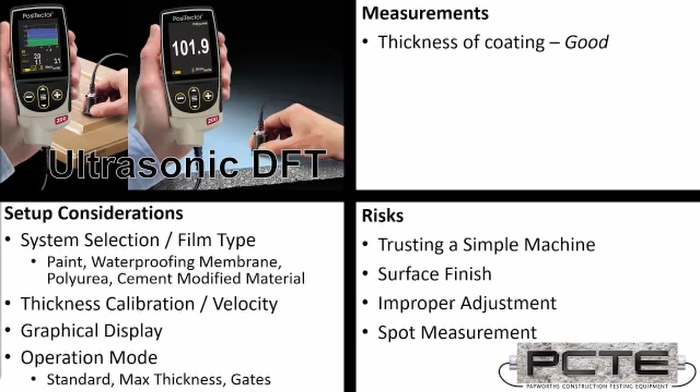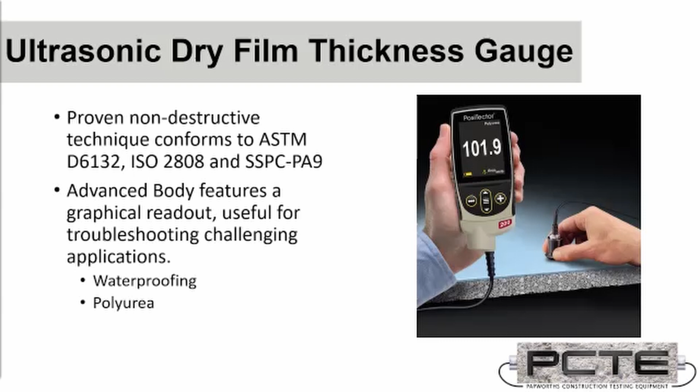So just a little bit more on the theory. The ultrasonic measurements, there are American and international standards that define the test. The DeFelsko PosiTector range offers graphical readout. I recommend this to everyone doing waterproofing measurements. I do think, just because that's a more complex setup than measuring paint, you simply have to be able to review what the machine is doing. I know I'm saying this a lot, but I really do believe in the operator seeing what the gauge has done and confirming.

The physical principle is when we change from one distinct material to another, we get a returning echo, a sound wave return from the ultrasonic pulse from the gauge. In this example, it's gone through two layers. There are two clear reflection peaks on the chart, and the gauge, using its automatic pick, has picked the tallest peak and recorded a thickness of 75 microns.

If I was teaching operation, I'd go into a little more detail on how these automated choices are made and how to adjust if the machine is reading the wrong reflection. Now, I say reading the wrong reflection - how do you tell? Well, you've got to know what you're expecting to find and be able to match that back to what you are finding in the real structure.

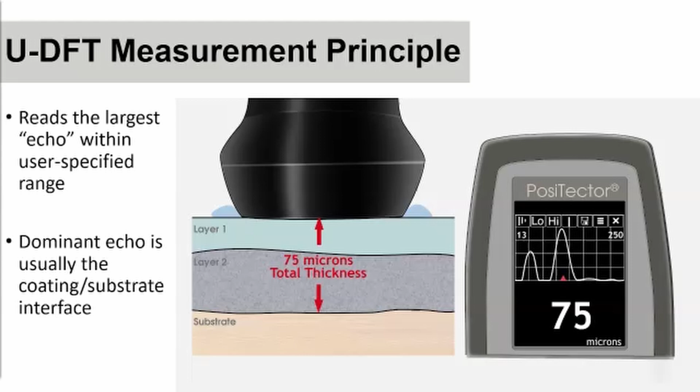Now, there are several stages to make sure you're comfortable. Firstly, there is calibration provided with PosiTector equipment, so it's important to make sure you've actually got that traceable documentation, making sure your gauge is operating correctly. It's also important, for the purpose of using it today, that you've checked its operation. The 200 series is provided with a reference chip of known thickness, which can be used to check that the gauge is still measuring that chip correctly. If the measurement is out - a little thicker or thinner than expected - you can adjust that gauge's readings to correctly match your verification sample.

Now, practically, you may not be provided with a reference chip that perfectly represents your materials. The supplied one from DeFelsko is a white plastic material, a reasonable model for paints and standard waterproofing membranes, but entirely inappropriate for materials like polyurea. So you may need to make these adjustments to your particular coating.

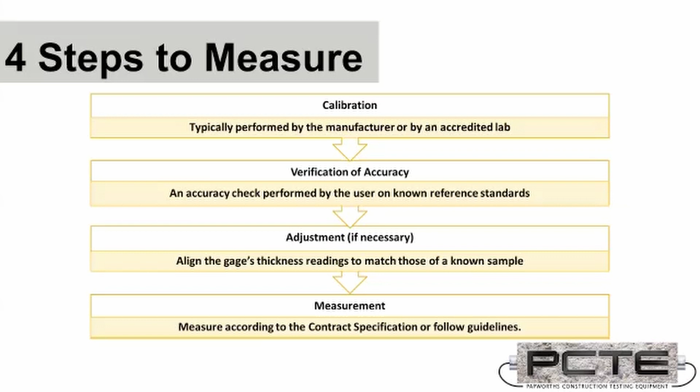And even if it's just a rough check, it's nice to compare samples of that material you've prepared off the final substrate, as an example, or samples you've cut from that substrate to make sure that it's adjusted and measuring correctly.

Then finally, you need to think about how you're measuring to actually capture the real performance on site. So again, I'm not at all a fan of taking an individual measurement and calling it done. There's too much variation, even within a small area, maybe 10 millimeters diameter sample area. There will be highs and lows.

There will be thicker sections of material. So you do need to collect and average your results, have an agreement if you're working for someone, how compliance will be measured, whether it's average or minimum measurements must be above a certain point. And you must have an approach from where you'll take those measurements, and whether there's a random sampling or other setup required to do that.

So that's a brief discussion about measuring coating thicknesses with ultrasound. Does anyone have any questions before I go on to talking about cover meters?

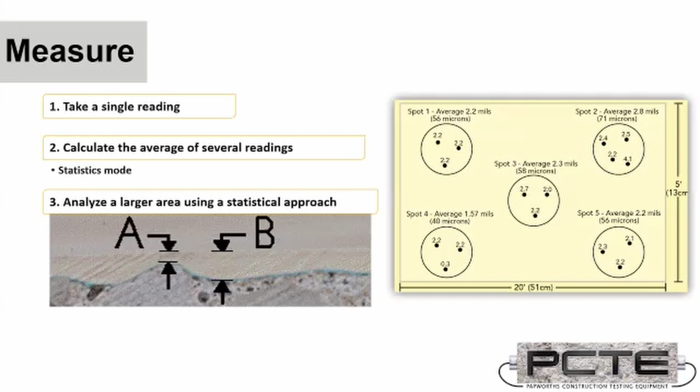So moving on to cover meter systems, we're still measuring thicknesses, but we're now measuring the thickness of the rebar cover, the thickness of the concrete from the surface to the top of the reinforcing steel.

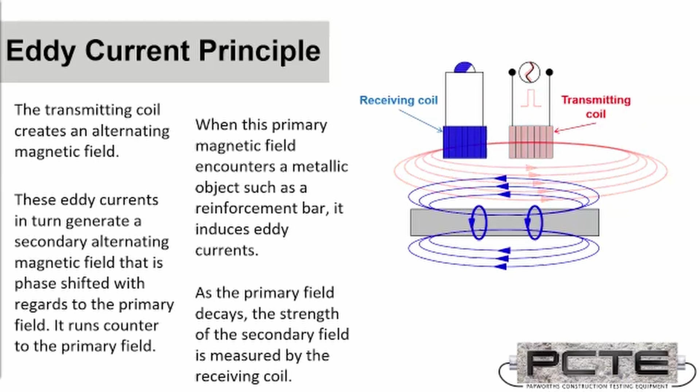It induces a current, electrical current in the reinforcing steel. This produces its own electromagnetic field, and we measure the strength of that electromagnetic field. That is the raw measurement from a cover meter. Again, it's not like a ruler or a caliper. We're measuring one value.

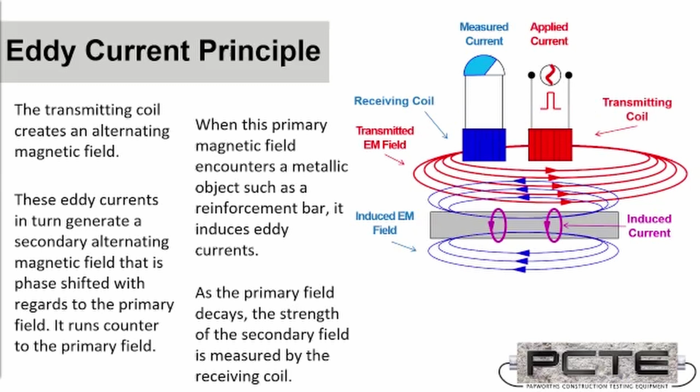So in order to convert from the signal strength to a depth, we need to enter reinforcing diameter. Now, we've got a defined range of performance for cover meters. So out to roughly 80 millimeters, you'll be within 1 millimeter of the real cover depth, which is very precise, provided you've entered the correct reinforcing diameter.

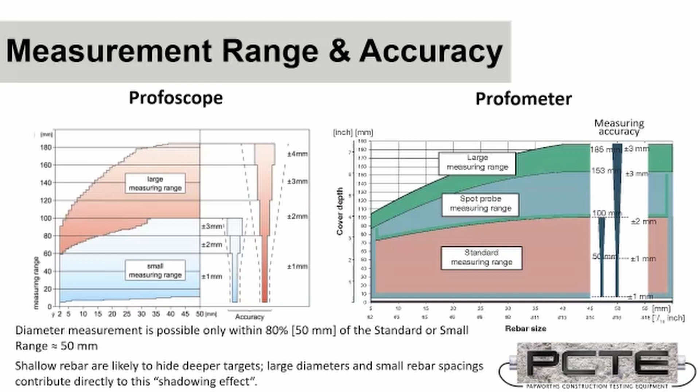Then it'll, at its worst, at the maximum range of around 140 millimeters, or a little bit deeper for very large reinforcing steel, you'll be at 3 or 4 millimeters precision. So this is information you can directly use. And that's why I call the cover meter measurement excellent. We've got defined performance and a defined procedure to achieve good measurements.

So the rebar diameter estimate is quite a different signal. We're measuring with a weaker and stronger signal strength coming from the probe, and essentially looking up what the expected performance for particular reinforcing sizes would be. This measurement works down to around 40 or 50 millimeters depth. It's an estimate - I would not like to give a particular range of plus or minus on this measurement. I have a comment from Harold about the aggregate in the concrete having an effect on values. Now, that's true. For a ferromagnetic cover meter - for eddy current cover meters, they would actually need to be metallic and conductive to affect the measurement, but ferromagnetic cover meters certainly will have a performance effect from the aggregate.

When I talk in a little more detail about the sources of interference, conductive metals are the big killer.

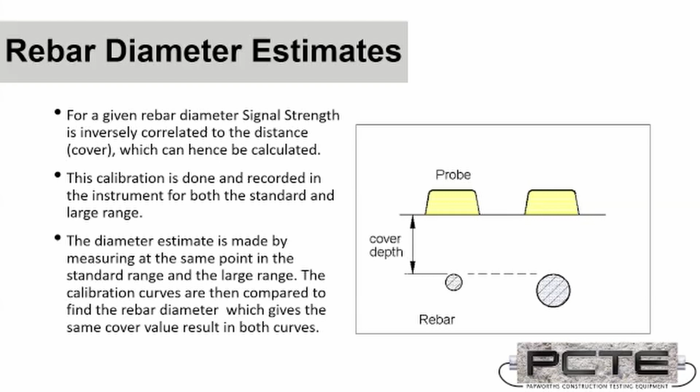Now, just talking about procedures, the most important aspect of getting the real reinforcing cover is you need to locate your measurement directly over a single reinforcing bar. If you just go straight to a concrete surface and place your cover meter on that surface, you're not going to be correctly measuring that.

So what we're going to want to do is actually follow a procedure to physically place that, to determine the reinforcing and lay out the grid of the reinforcing. So to begin, I'm going to want to take a scan.

So to begin, I'm going to want to locate the reinforcing steel in one direction. I'll cross it usually 3 times to ensure it's straight, and I'll pick up its position. I am not yet recording the depth of the reinforcing steel during this stage of the process.

I can now locate the reinforcing crossing in the other direction. Because I can situate my cover meter probe in between, in this case, the horizontal bars, I can correctly measure the depth to the reinforcing bars, provided I've entered a correct reinforcing diameter. I'll take several measurements so I can get a minimum, maximum, and an average - you never want to take a single measurement with non-destructive tools. Finally, I can go back and record the cover depth of the horizontal bars.

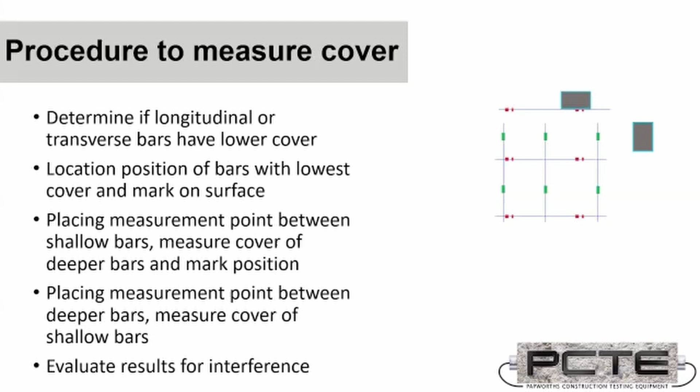So just to cover that again, we are physically locating our horizontal bars. Then we're locating our vertical bars and recording cover depth during that process. And then finally, I'm going back through and recording cover depth of my horizontal bars, now that I can locate the probe correctly distanced from the other reinforcing steel.

So next I'll go into measurement of the ground penetrating radar. Does anyone have any questions on cover meters before I continue? Or comments? Again, it's as much a discussion as a presentation today, so please do let me know.

We had a question about whether the Profometer is any more accurate than the profoscope. So the Profometer and the Profoscope are Proceq brand cover meters. They both use the same measurement procedure, a pulsed eddy current measurement, which operates to the same precision. If you have a look at my previous slide showing precisions of cover meters, I actually had a chart talking about the Profoscope and the Profometer cover meter.

If I was choosing between these two options for my business, it would be more about whether I have to do complex work, for which the Profometer has more adjustments and better visualization to make complex work possible. Something like measuring reinforcing cages and precast elements - I like a Profometer for that. It's easier to deal with congestion and more involved reinforcing layouts. Whereas if it's a simple wall or floor every time, a profoscope's not going to struggle. But it is possible to achieve the same performance with either device, provided you take enough care with each device and choose good measurement spots.

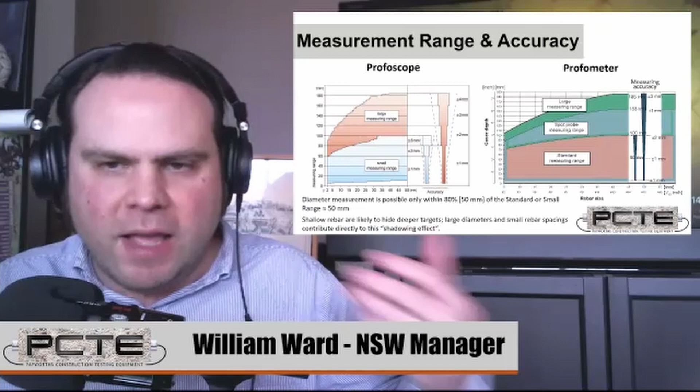John asked if it is possible to know what to do if we do not know reinforcement diameters, which is a good question. With as-built structures, often you will be able to get that information. If you don't know, it is possible to look at the range of possibilities.

So this is another chart from the profoscope manual, which explains the variation in cover depth precision - sorry, the variation in the measurements if we have reinforcing bars that are bigger or smaller than a 16 mil bar, and we set the machine to 16 mil. So let's say you have a slab on ground, and there's a possibility you could have bars from 8 millimeters to 16 millimeters. You could use this information to determine the additional uncertainty of your depth measurements and maybe make a conservative choice when you don't know the reinforcing diameter.

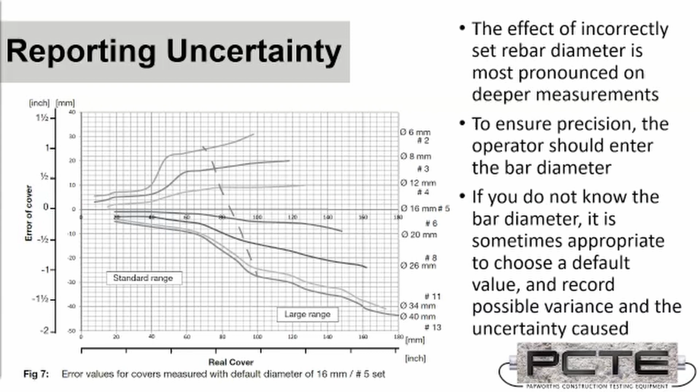So this definitely needs to be covered in your procedures if you can't get that information. I do hope for as-built structures you would have the opportunity to ask about what's intended to be in there, but if you don't, there's ways to consider that. Do I have any more questions on cover meters before we continue?

Mal asks, what equipment is more accurate to measure reinforcing diameters, cover meters or other? Well, I would say other because I'd use a drill. The cover meters will estimate reinforcing diameter, but they're not good enough that I would consider that measurement to be your master reference for diameter.

Particularly when we are concerned about measuring diameter, it needs to be backed up by inspection. Again, for a new structure where we know what's in there, this becomes less of a question. But when we don't know, we've got to back it up with physical confirmation.

If you want to talk more on this, as this question comes up almost every time I discuss cover meters in other webinars, there's more detail in my previous cover meter webinar on our YouTube channel. I've got another question: if there's a tile on the floor, how will this affect the rebar diameter measurement results?

It shouldn't affect the performance of the diameter measurement because it's not a source of interference, it's merely an apparent thickening. If there was additional metal as part of installing that tile, it would affect the measurement. Also, if that thickening placed the overall cover depth below around the 40-50 mil range for which the diameter measurement works, it would prevent the measurement occurring.

Ground penetrating radar tools are our first scanning tool, which means we're no longer taking a signal strength or an individual signal measurement. With our dry film thickness gauge, it was ultrasound - we sent a single sound pulse and measured the signal that returned. With our cover meter, we just measure signal strength. With ground penetrating radar, we are now sending repeated pulses of microwave energy and recording the response.

Particularly with the Proceq instruments, we're using a slightly different principle - a step frequency continuous wave antenna - but practically we no longer get an individual measurement or result. We get a scan, a visual representation of the structure. Within that visual representation, a skilled operator can interpret it to determine the position and depth of reinforcing steel, the position and depth of embedded objects, and if the concrete structure is sufficiently thin, we can also usually see the thickness within the range of the ground penetrating radar.

Everything except the lateral position of objects will not be correctly recorded without some setup. Lateral position is based upon the physical wheels attached to your radar - encoder wheels that know how far it's moved left and right. That's why object position is a measurement. We're seeing the position on the image produced by the scanner. If we line up directly on top of it, or measure between two positions, we can determine that geometry as a direct measurement. But our depth measurements are indirect.

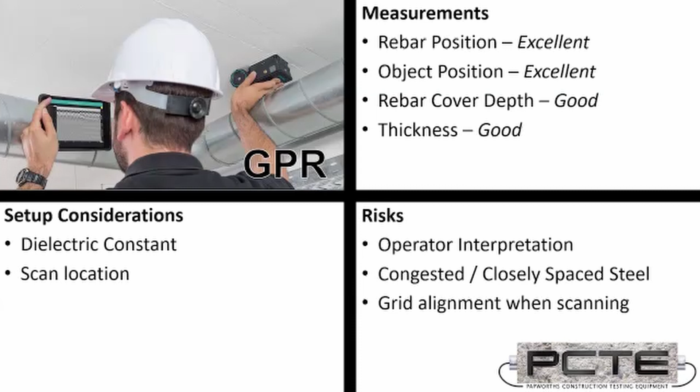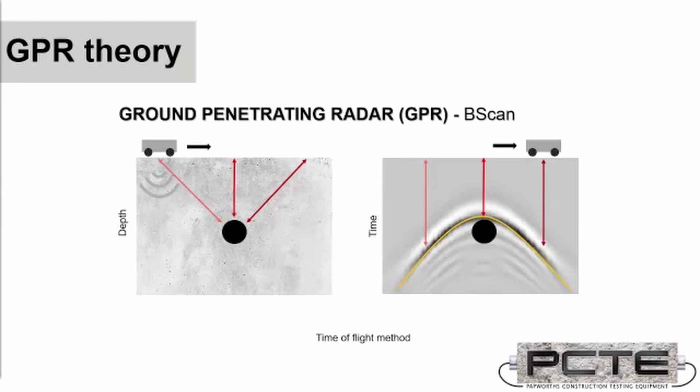So just a quick word on the physics. The ground penetrating radar sends electromagnetic pulses, a signal into the structure. As we become close to a target, which we're crossing at 90 degrees, we will produce a hyperbolic signal, a little bit like a fish finder. What do I mean by that? Let me show that graphically.

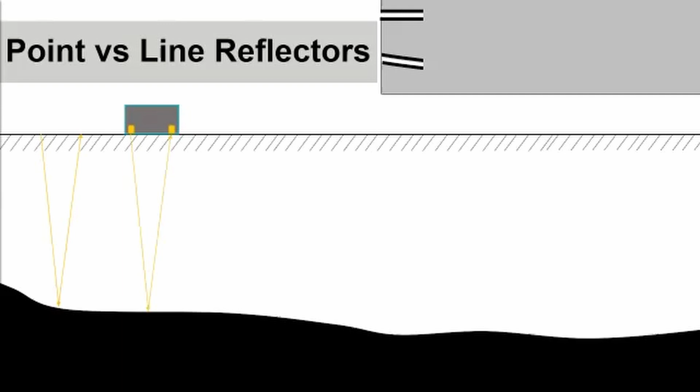So the thickness of the concrete structure or a layer inside soil, if we're going over a flat target, the closest point for the radar is always underneath the machine. So we get a flat presentation for flat targets we're crossing parallel to.

When we cross an embedded object perpendicular - excuse me a second, I'll just mute that sound - when we're crossing an embedded object at 90 degrees, we start to get signal from that object before we reach it. When we are directly over top at the closest point of that embedded object, we have the peak of the hyperbolic signal, and then we still get signal as we pass beyond that embedded object.

In this case, I've chosen a steel object because I also want to highlight the effect of steel higher in a structure, where it will shadow what's underneath it, so it can hide additional reinforcing or other targets if they're not clearly visible due to the hyperbolic reflections from them.

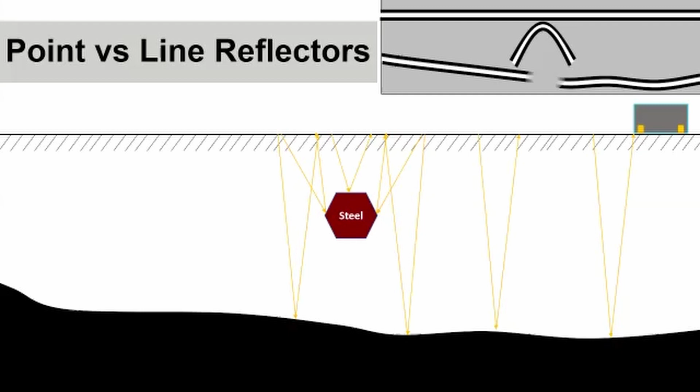So, the first risk I talked about was alignment of the grid scan. Whenever we're showing one of these quite clever presentations where we have the results projected over a surface, or we have a 2D slice or a 3D presentation of data, what we've done is taken several scans on an aligning grid. And when we take those scans, we're then able to stitch them together to get our slice or 3D presentation.

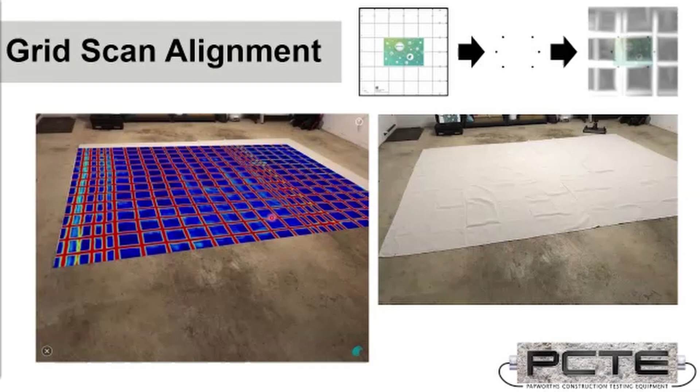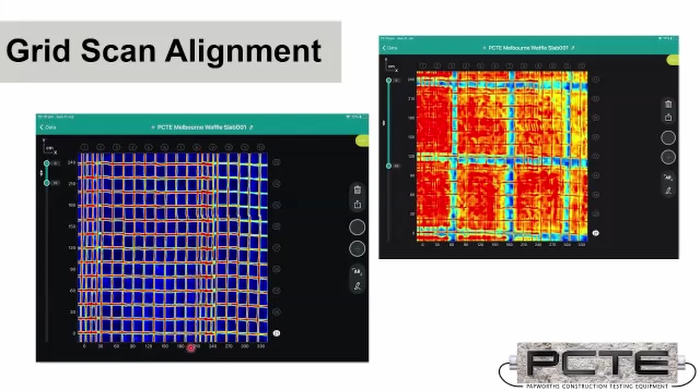So we can see here, this was taken on a waffle pod slab, so polystyrene void formers forming thickened ribs on the underside of the structure, which you can see here, and also with conventional reinforcing. We can see where that conventional reinforcing laps, and everything's pretty well aligned on this. This was the hero scan. This was the good one.

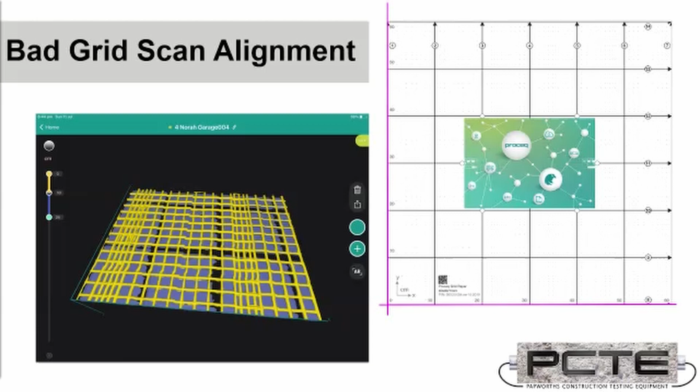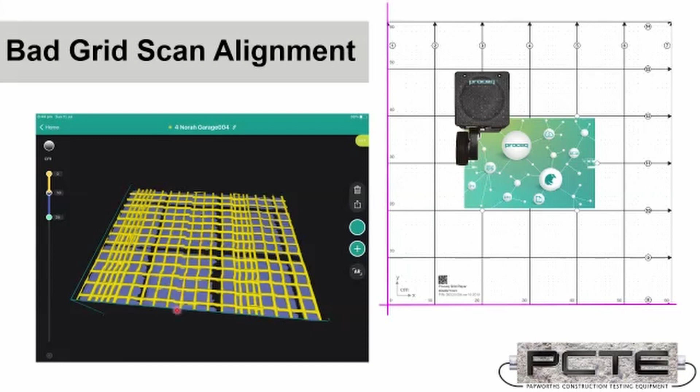But what I want to actually show you is what happens when the scan isn't lined up correctly. This is a previous scan of the same area where it wasn't quite right. You can see these little stitches and little disconnects. What's happened here is that when my colleague Stu was taking this measurement, he didn't align the radar correctly on some of his scans. What we would have done is, when he was placing the radar probe onto his grid, his alignment would have been, rather than straight on top of the 0 point, it might have been slightly after or slightly before the start line, with the visual effect that the reinforcing is no longer continuous.

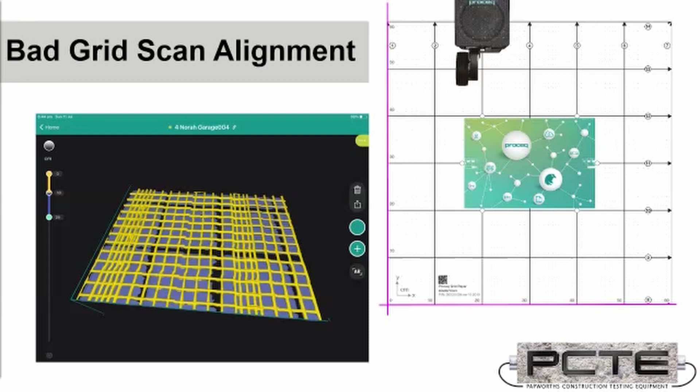So if you are going to make use of 3D functions or scans where you're combining several measurements - this was taken with the GP8100 radar, so that's an array antenna, 6 scans per movement, so it's quite a large scan, around 3 by 4 meters - that initial alignment is the critical thing to get right to have everything in the correct position.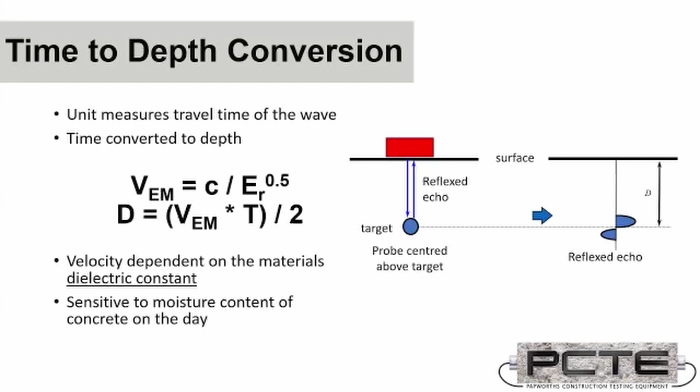Now, let's talk about depth. Once again, we're not directly measuring depth. We don't have a ruler. We're measuring time, the time for the radar signal to go down and come back. In order to know the velocity of that signal and mathematically convert to thickness, we need to know a property known as the dielectric constant.

It's a unitless measure of a material's ability to hold and pass a charge. Values range from 1 to around 81 typically. The reason I highlight that is water at 81 is quite a large value, so it means that the amount of water in the concrete will affect the precision of depth measurements. So we need to adjust dielectric on the day we take measurements, not adjusting depth, but coming back to the same site 2 weeks later and considering that value to be okay.

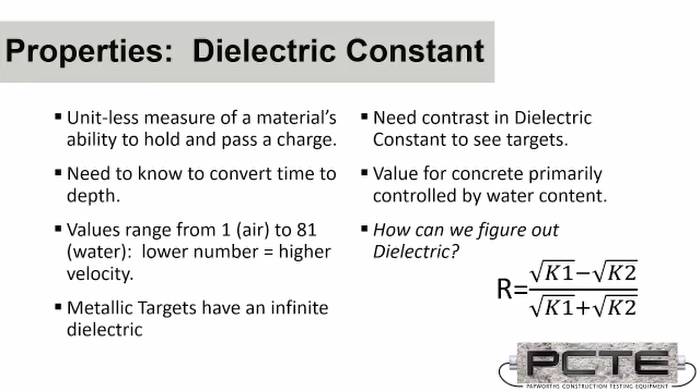It's a measurement that you adjust each time you go to site. There are a couple of ways we can make the choices, and the quality of the input gives us the quality of the thickness measurements, along with the quality of the positioning pick by the operator. So specifically here, we could take a guess.

5 to 11 is a reasonable range for cured concrete. If we know the physical thickness of that constructed element, or if we know a precise depth, maybe from a cover meter measurement, we could use that to choose a dielectric to get those depths right and bring everything else into correct depth. Or it's possible to overlay the hyperbola on the scan with a mask that represents the mathematical shape of hyperbolas for a particular depth.

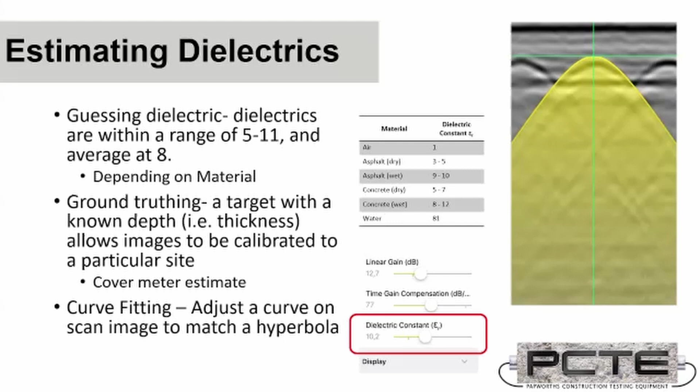So if you haven't taken one of these steps, the thickness value on the left-hand side of the scans is not meaningful. You haven't set it up, you haven't made the adjustment on that procedure of calibration, verification, adjustment, and measurement. So you've got to make that adjustment before you can go forward.

Now, a few more risks. We are talking about as-built structures, which means the concrete may be quite fresh. This is going to have a big effect on the amount of water, so the dielectrics may be quite high. We may also have signal loss, so we may not go as deep as the physical devices normally can. A device that might achieve a 700 millimeters maximum depth may only achieve 300 or 400 millimeters or less in very fresh concrete.

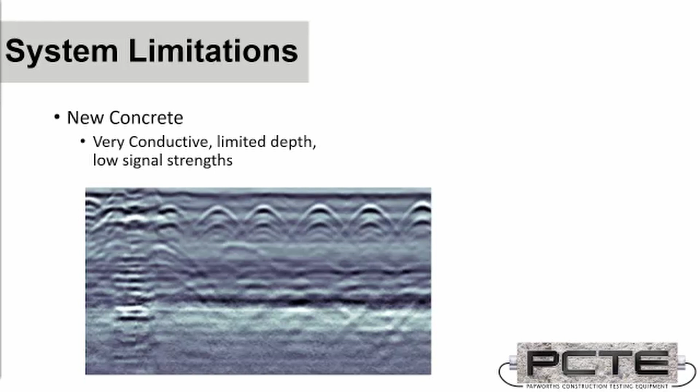So we can lose signal, and we need to take particular care with our dielectric adjustments. We also need to be aware that our biggest source of metal at the surface is that reinforcing, and that metal can either interrupt the signal completely. If you're scanning on top of a metal plate, the radar's not even making it through the metal. If it's a steel fiber reinforced structure, that's just the same - it's not going to go in. And you can get shadowing effects, where metal above a target can cause shadowing underneath. In this example, there were shadows on the thickness measurement because of the metallic targets above it.

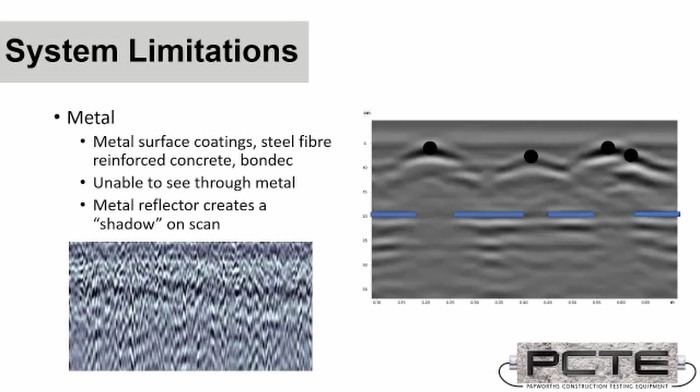Now, I did see a quick question. The question was, how do concrete overlays such as asphalt affect GPR scanning? Can you allow for non-uniform dielectric constants when GPR scanning to account for asphalt over concrete?

That's a very good question, and you're quite right - it's not going to be a uniform dielectric. The asphalt is going to have a very different dielectric value than the concrete. So especially if that asphalt varied in thickness, it becomes very hard to get a really precise thickness calibration using only a single dielectric value.

Now, the GS8000, which is the utility location radar from Proceq, actually offers multi-layer dielectric constants. You can set a gate - the dielectric above would be the dielectric calibrated for asphalt, the dielectric below would be the dielectric chosen for concrete. But that's not a tool available on other systems, and it's quite useful as well. There are other ways with post-processing software to take more care with it on something like a typical concrete scanner output.

Now, I'll wait a moment because I'm sure there's a few more GPR questions before I go on. So bear with me, and if there's anything you'd like to ask, unmute or leave the notes in the chat. I'd be happy to cover those, and let other people provide their input before we go on. So I'll wait a moment before continuing.

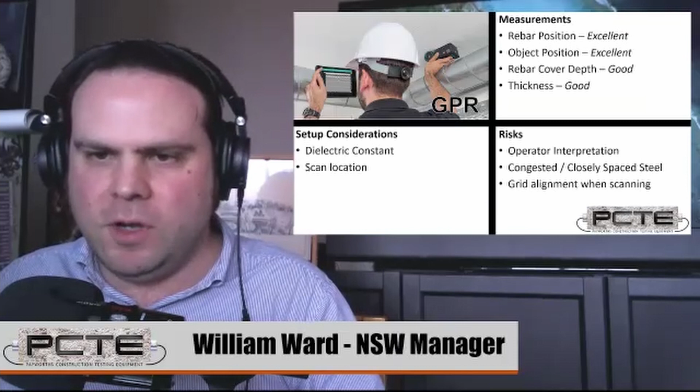Now, voiding is actually hard to see with radar in the first place. You could see on the scan of the void former material, the polystyrene void formers in that waffle slab, we could see the extent of that. And yes, we can get the size of a 1 meter by 1.5 meter piece of polystyrene, but we're probably not even going to see small voids honeycombing on a ground penetrating radar scan. It's almost a source of interference to radar scanning.

Some of our previous presentations on radar go into more detail about detecting voids with radar, but it is not the correct tool for void detection for quality control, if you're looking for honeycomb voiding or voids that aren't meant to be there and aren't a physical void former.

It's better to work with something like an ultrasonic pulse echo scanner to look for voiding. Continuing down, a question: can we accurately scan top and bottom reo, both, or only top reo? If your reinforcing reflections are visible for top and bottom steel and your dielectric is correctly set, the depth and position information is meaningful for both. On diameter though, slightly controversial belief, I don't believe there's any information there.

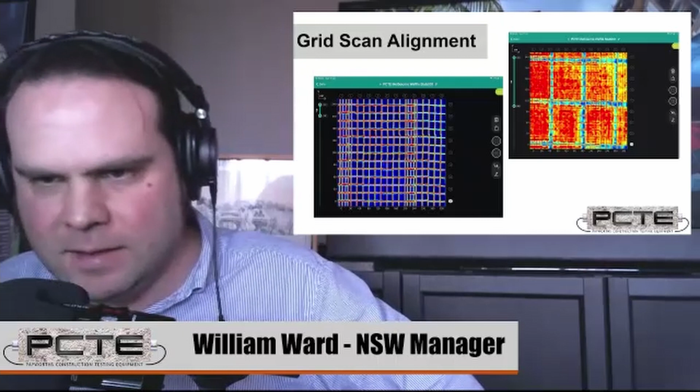Glass fiber reinforced polymer, GFRP reinforcing, gives a weaker signal but is detectable, just like any other embedded object, if it has sufficiently different electrical properties you can see the hyperbolic reflections from it. It will be a weaker signal than a metallic target.

So let's move on from radar and talk a little bit about impact echo testing. I'll cover theory, a little bit of practice, but let's begin with considering what measurement we can take. Impact echo is a technique used for two main purposes: to determine the thickness of a flat plate of concrete.

By a plate, we might mean a wall or a floor. We don't mean a circular column, or something with a complex geometry. It's also used to determine if we've got voiding inside structures, but I'm not covering that today because I'm talking about measurements and thicknesses. We do have to consider the speed of sound in the concrete, because that's used directly in the conversion from frequency to thickness. I'll show how impact echo scans work and explain that.

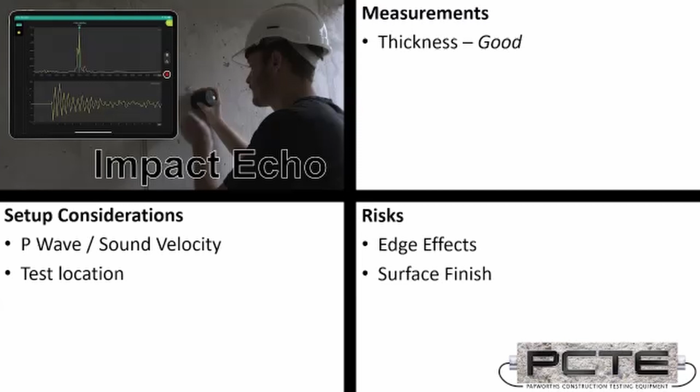We do need to pick a good place. We want a plate of concrete, a wall or a floor, in from the edges. I've got a presentation of that as well. Also with impact echo testing, if you've got a rough surface finish, it's more difficult to complete the test. You need to be more careful with your impacts and more careful with the final measurements.

So let's talk about what impact echo is. It is a resonant frequency measurement of a structure. We give it the velocity of the speed of sound. We determine the frequency from an impulse, a strike to the surface, and determine, if it's a flat plate, the thickness - and if it's voided, the voiding will change that measurement.

So we physically strike the surface and record the waveform. We do a fast Fourier transform to determine the dominant frequency, the resonant frequency of that concrete slab. And because we know the velocity, we can calculate the thickness.

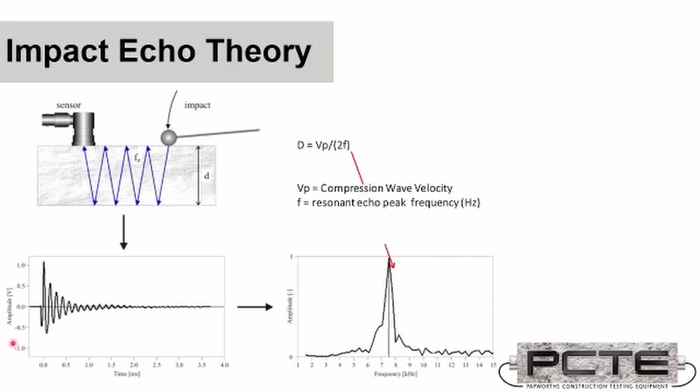So it's very suited to taking a single point measurement of thickness. In this example, this was on a boat ramp, which got thicker as it got deeper, so between 500 to 650 millimeters thickness. There are other tools you can use for thickness measurements, ultrasonic pulse echo, but impact echo is quite associated with thickness measurement as a simple tool.

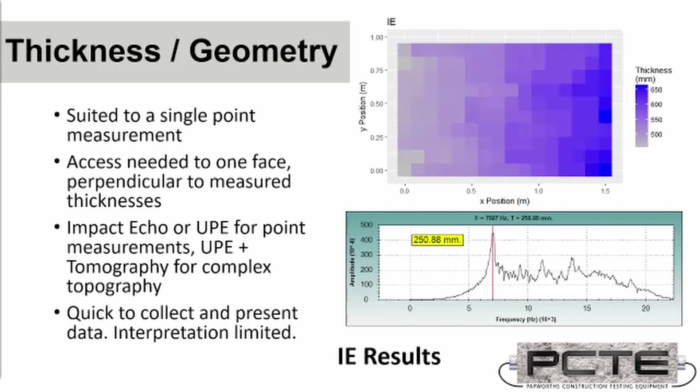So I was talking about what you can do successfully. Here I've marked in green this region and these regions as an appropriate place to look for a thickness measurement. This is a coated structure that you need a solid coating properly bonded to test through. You can't test on tiles, you can't test on a rubbery coating.

You need to be above a minimum thickness, and it'll depend upon which device you have and the way the sensors are recorded from, how thick that is. That'll be a specification for your impact echo system. And you need that flat plate-like element, so internal delaminations will definitely be detected and would affect the ability to measure thickness.

I've also marked as poor these edges, because you do have issues towards the edges of a plate, and also regions where the thickness changes - you'll have a sort of zone where it changes from one to the other.

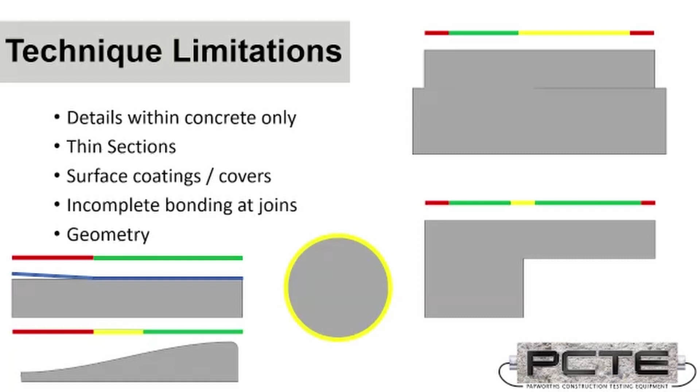So, any questions or comments on impact echo testing? Similarly, William, the issues with reflections from the sides of slabs - you'll find the same thing with GPR. It will also pick up the sides of slabs, which will interfere with perimeter bars and things like that you're looking for.

The other thing is that impact echo, in relation to looking for piers under a waffle slab, is probably more appropriate than GPR. Can be, certainly - you've got a much greater thickness range. I was going to discuss thickness ranges at the end, but that's right.

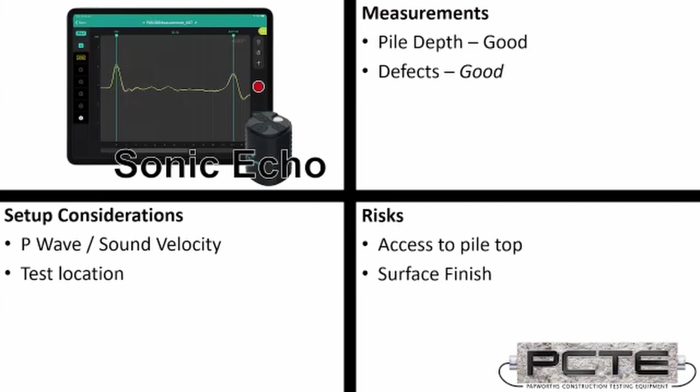We do, once again, need to know the speed of sound to that material, because we're getting time and we want a distance. We also need to be able to get access to the top of the pile, physically bond and place our accelerometer sensor on top, so it needs to be sufficiently flat. Then we'll be able to do our investigation for defects and thickness.

The basic principle is you put an accelerometer on, you give it an almighty whack, and you record the time between the strike and the returning signal.

If it's very thin, you may find impact echo is more appropriate. Certainly the maximum range for impact echo is 1.5 to 1.8 meters, depending upon the size of the hammer you use. But for column foundations, piles, poles, sonic echo or pile integrity testing is very commonly used to look for large changes in the structure.

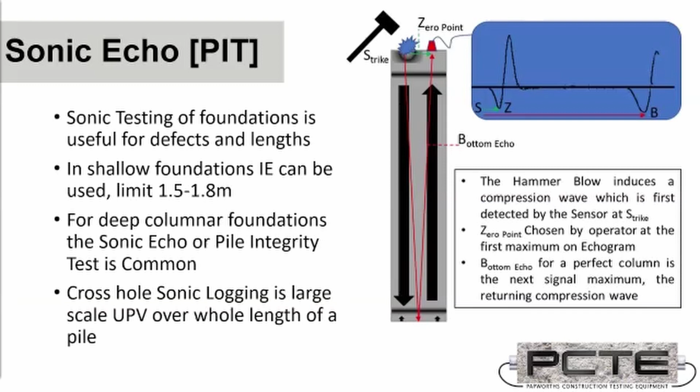This is the typical output of a sonic echo test, where you have a signal from the hammer blow and the returning signal after the hammer blow comes in at the end. The kind of defects you find—once again, we're not really looking at honeycombing or small voids—we're looking at large changes in the pile geometry.

So we're comparing the expected length to see if we're shorter than that. If you've got a break some distance down the pile, or a thinning or thickening of that pile—those situations, the crack, the necking, and the bulging—will also return a reflection to the pile test.

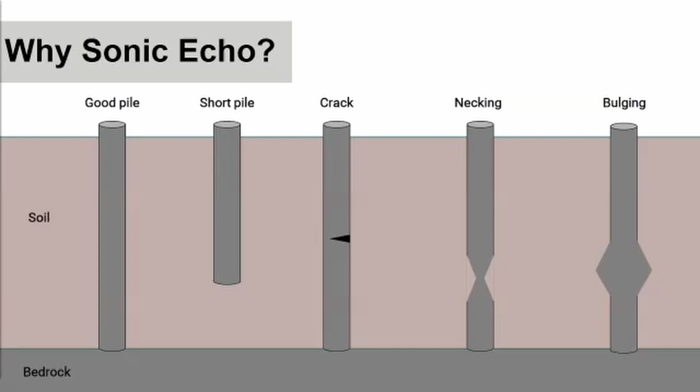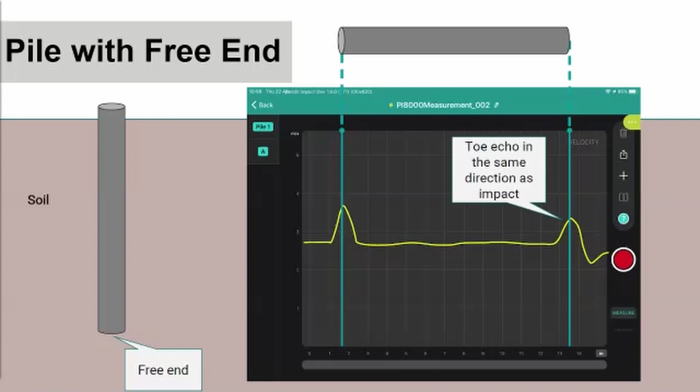Typically, if it's a friction pile, so it's not in physical contact with the solid rock, you would have your sending and receiving blows come in at the same orientation. And if you are going towards a pile which is into bedrock, you'll have a return in the other direction.

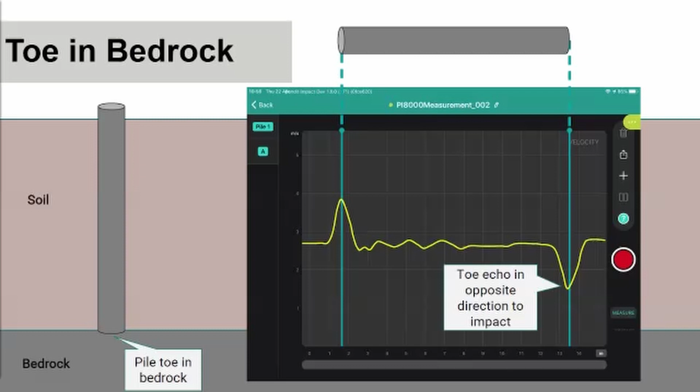There's a lot more nuance to this interpretation. You'll get reflections from changes in soil type, changes from soil to bedrock. If you actually have a section of the pile going through the bedrock, you'll get changes from the mentioned defects and other aspects. So again, this is not a guide to interpretation—this is just a quick overview of how sonic echo testing can be used to evaluate and measure depths of piles, and calling out that if you're doing that, you need to know the velocity to have a meaningful value.

So just a final note about the range of measurement: thickness measurement maximum depends on the dry film thickness gauge you pick—your ranges are maybe 3.5 or 8 millimeters. Cover meter maximum is around 140 millimeters for 16 mil reinforcing bars. Radar, depending upon choice, maybe 700 to 800 millimeters absolute maximum depth for very well performing concrete radar.

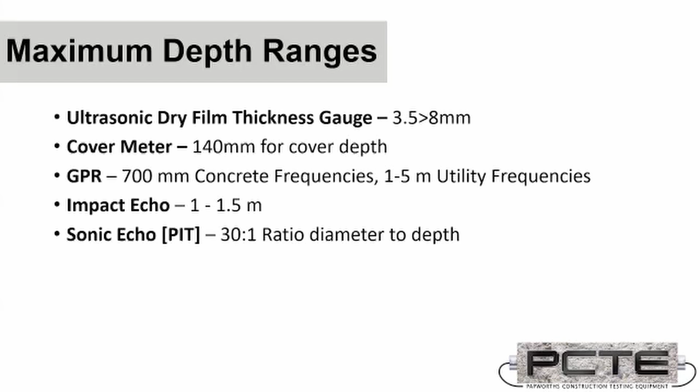Utility frequencies, at lower frequency energy, reach somewhat deeper, to several meters, depending upon soil conditions. Impact echo, 1.5, maybe as much as 2 meters thickness with care and slightly different impacts. And sonic echo, the PIT testing, you're controlled by the ratio—maybe a 20 to 30 to 1 ratio of diameter to depth with those tests.